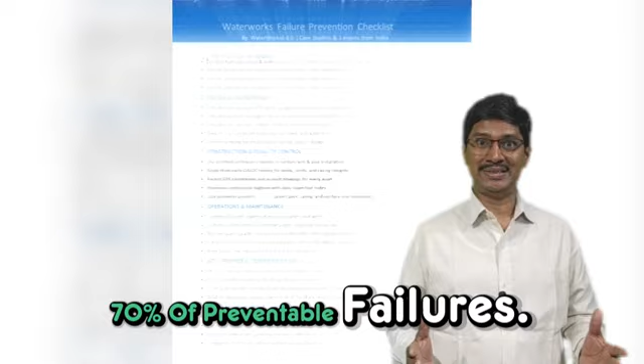Every failure you will see today is real people, real engineering decisions, real consequences, and the same mistakes repeat again and again from small panchayat to mega city. So this video is not just information, it's a survival guide for engineers, consultants, contractors, operators, and even administrators. Alright, let's begin.

Let's start in Chennai, 2019. You may remember the headlines. City faces day zero. 4 major reservoirs bone dry. People lined up for hours near tanker stations. Hotels shut down kitchens. IT offices reduced working days. But here is the truth. This was not only a rainfall crisis, it was a structural and planning crisis.

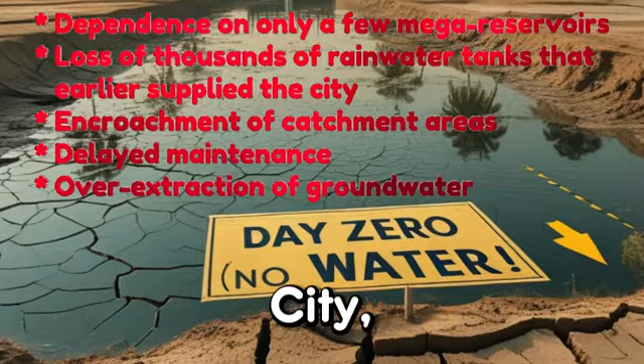What went wrong? Dependence on only a few mega reservoirs. Loss of thousands of rainwater tanks that earlier supplied the city. Encroachment of catchment areas. Delayed maintenance. Over-extraction of groundwater. The engineering lesson: a system fails when it has no redundancy and no recharge.

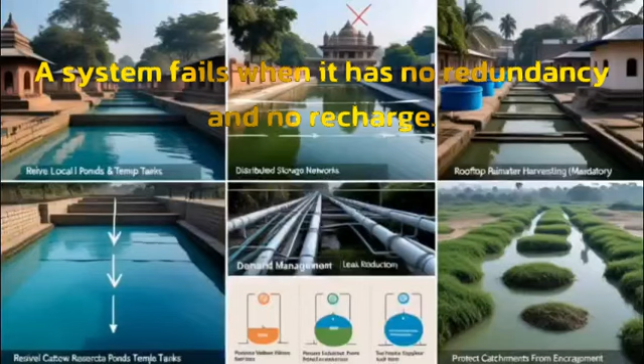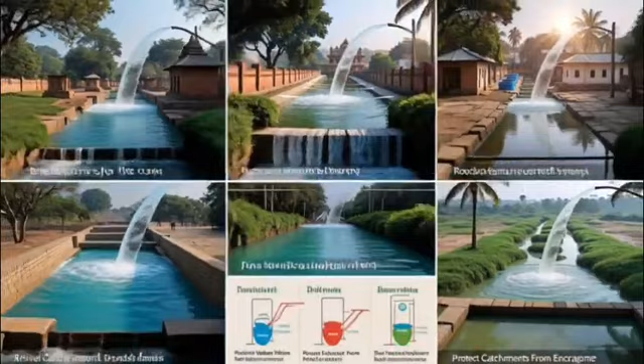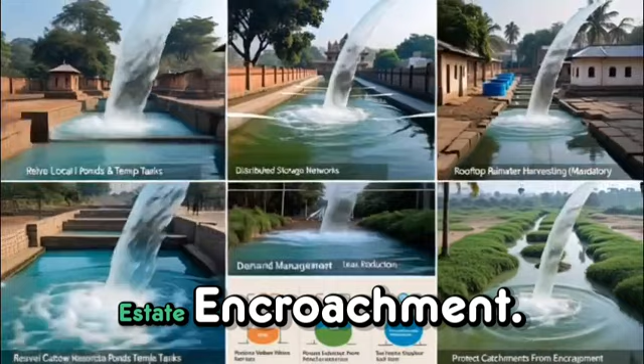Prevention strategy: revive local ponds and temple tanks. Create distributed storage networks, not single point dependence. Mandate rooftop rainwater harvesting enforcement. Use demand management, pressure control, tariffs, leak reduction. Protect catchments from real estate encroachment. Diversify supply, recharge always. Don't wait for the reservoir to run dry.

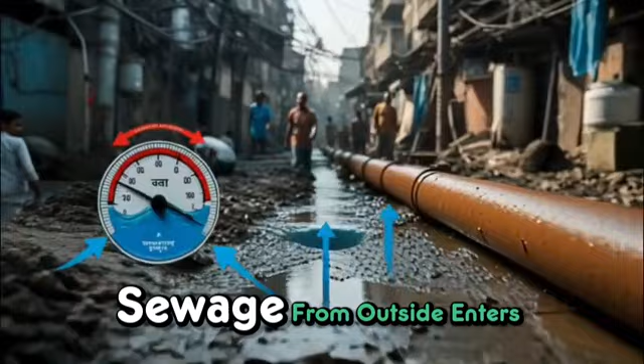Now shift to Delhi, a city with one of the largest water distribution systems in India. Yet, non-revenue water is massive. Pipes are decades old. Many sections still run on intermittent supply, and that's where the contamination starts. Because every time pressure drops, sewage from outside enters through the cracks and joints. Residents often report foul smell, light brown water, or sudden turbidity spikes.

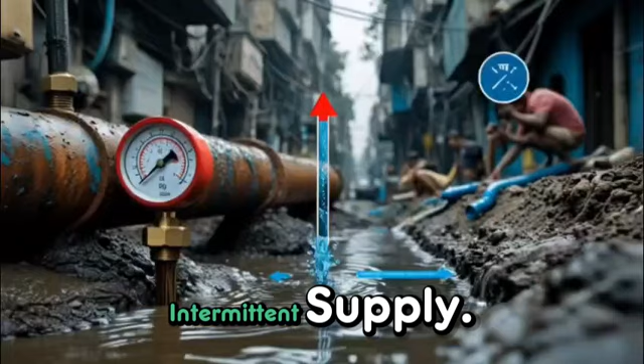Let's see its causes. First, old pipelines made of GI or corroded steel. Second, unchecked illegal connections. Third, pressure drops due to intermittent supply. Fourth, no district metered areas. Fifth, limited preventive maintenance. We can see many cases in sites like this. In several Delhi colonies, samples repeatedly failed bacteriological tests right after supply resumed. Classic sign of negative pressure suction.

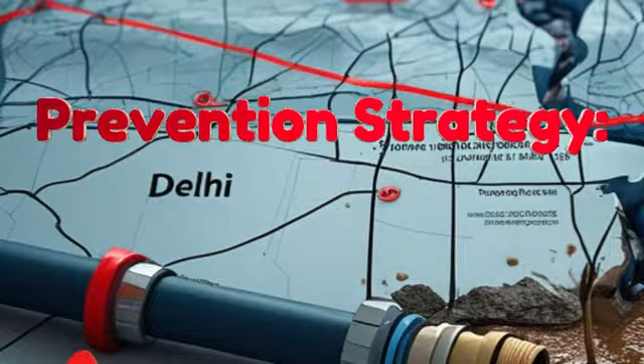We can improve the supply by adopting these prevention strategies. First, upgrade to 24/7 continuous pressurized supply. Second, replace vulnerable mains with HDPE or DI. Third, deploy DMAs with smart meters. Fourth, GIS map all pipelines and valves. Fifth, strict cross connection enforcement. Sixth, maintain chlorine residual uniformly. And always remember, pressure plus good pipes equals safe drinking water.

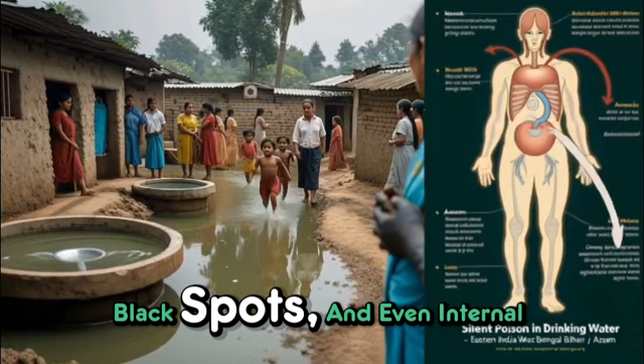Let's move east. West Bengal, Bihar, Assam. Here, millions depend on shallow tube wells. But over the last few decades, arsenic contamination emerged as a silent killer. Chronic exposure leads to skin lesions, black spots, and even internal organ damage. In Western India, the parallel story is fluoride contamination, causing bone deformities in children.

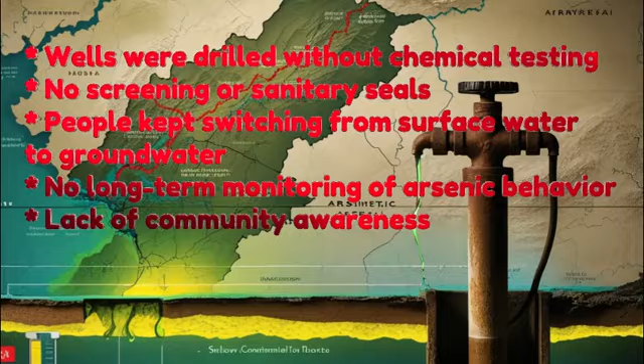Why did this happen? First, wells were drilled without chemical testing. Second, no screening or sanitary seals. Third, people kept switching from surface water to groundwater. Fourth, no long-term monitoring of arsenic behavior. Fifth, lack of community awareness. Field insight: a single village having 40 hand pumps may have arsenic safe water in 3 pumps and unsafe water in the remaining 37 just because of geological layering.

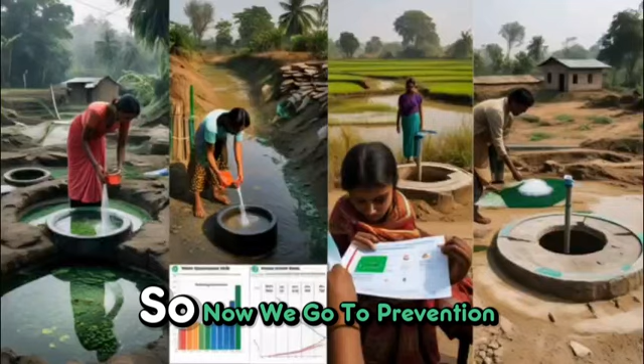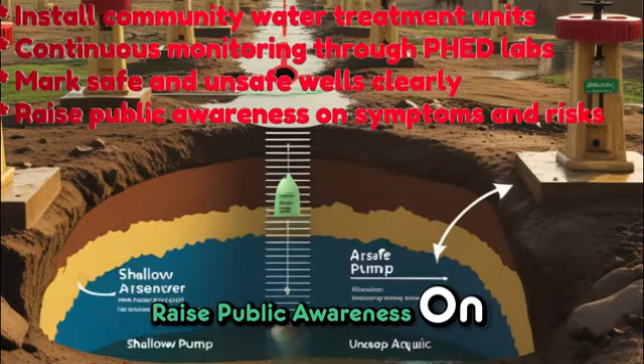So now we go to prevention strategy. First, always perform pre-drilling water quality tests. Second, use deep aquifers only after expert hydrological verification. Third, install community water treatment units. Fourth, continuous monitoring through PHED labs. Fifth, mark safe and unsafe wells clearly. Sixth, raise public awareness on symptoms and risks. And always keep in mind: never pump what you have not tested.

In Bengaluru, a single pipeline burst can waste lakhs of liters and flood entire stretches of road. Why so frequent? Because the network is old, the terrain is hilly, and pressure fluctuations are extreme. In many cases, the pipeline failure is not due to material failure, but pressure management failure. Let's see some root causes here.

First, uneven pressure zones. Second, road cutting by multiple agencies. Third, aging pipelines. Fourth, no predictive maintenance. Fifth, lack of valve control maps. Now we go to a case example.

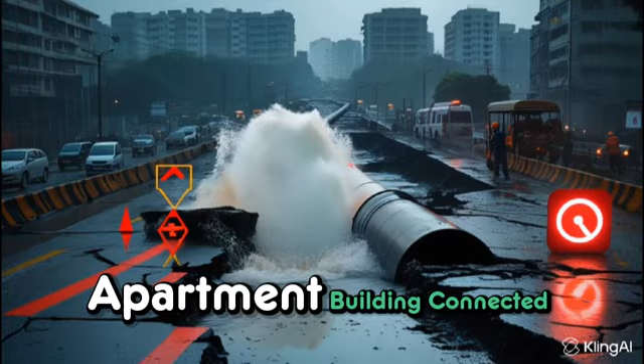A DI main burst after a new apartment building connected illegally and shifted loads on the pipeline bedding. In another case, contractors digging for optical fiber damaged a major water main because no accurate GIS map existed. Therefore, we are to go for its prevention strategy.

First, routine pipe condition assessment. Second, road cutting coordination across departments. Third, replace high-risk pipelines on priority. Fourth, install pressure reducing valves (PRVs). Fifth, a community leak report app. Sixth, emergency repair teams with response targets.

Key message to bear in mind always: fix leaks when they whisper, not when they scream. Finally, the rural and coastal crisis. Gujarat, Tamil Nadu, Andhra Pradesh, Odisha.

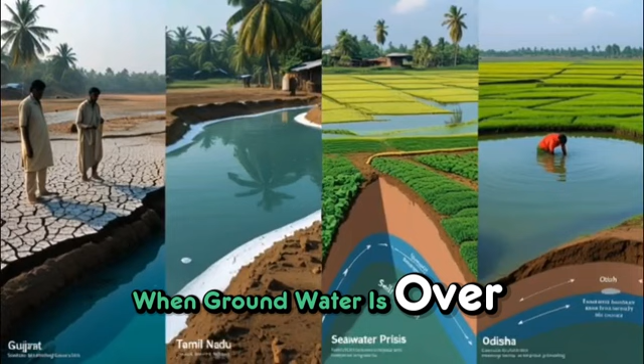When groundwater is overpumped, freshwater pressure drops and saltwater enters the aquifer. Farmers notice it first. Their pumps give more water, but it becomes salty. Then borewells start collapsing or yielding very low discharge.

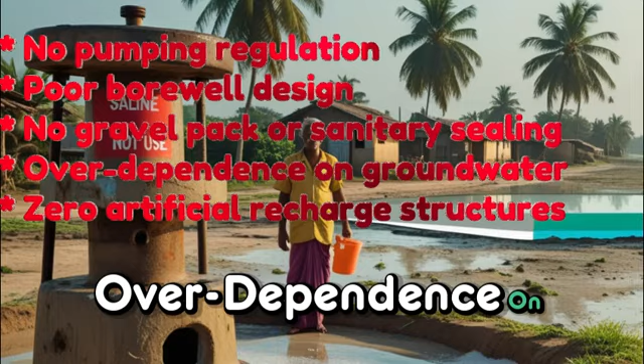Key causes we noticed about these are: first, no pumping regulations. Second, poor borewell design. Third, no gravel pack or sanitary sealing. Fourth, over dependence on groundwater. Fifth, zero artificial recharge structures. Here we look at field restoration.

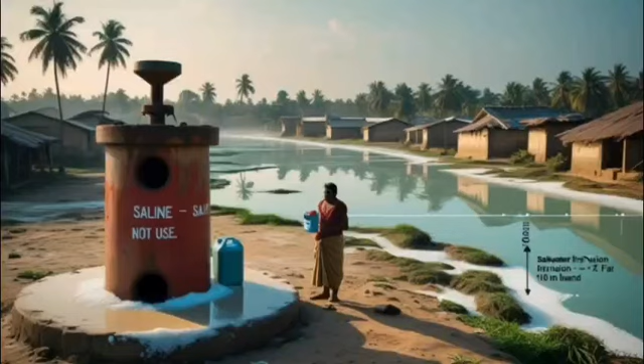In parts of coastal Tamil Nadu, entire villages abandoned old borewells because saltwater intrusion reached 7 to 10 kilometers in length. So now we can take these prevention strategies. First, pumping permits and monitoring. Second, proper well design: casing, screen, gravel pack. Third, mandatory recharge wells and percolation ponds.

Fourth, reduced pumping during summer. Fifth, promote treated surface water over groundwater. Final message to remember: pump less, recharge more, protect your aquifer.

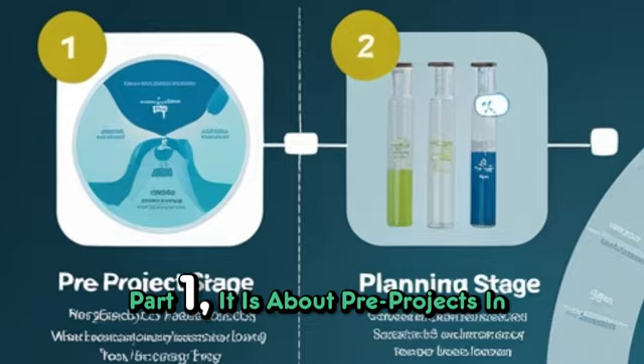Here is your WATERWORKS 360 prevention checklist. It has been divided into 5 parts. Use it during planning, tendering and field inspections. Part 1 is about pre-project: first, hydrogeologic survey. Second, soil suitability check. Third, water quality testing. Fourth, risk register. Fifth, community consultation.

The second part is about design: first, redundancy in storage. Second, pressure zoning. Third, certified pipe materials. Fourth, sampling points. Fifth, cross connection separation.

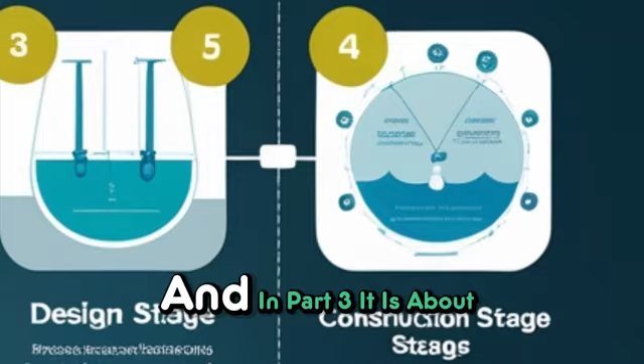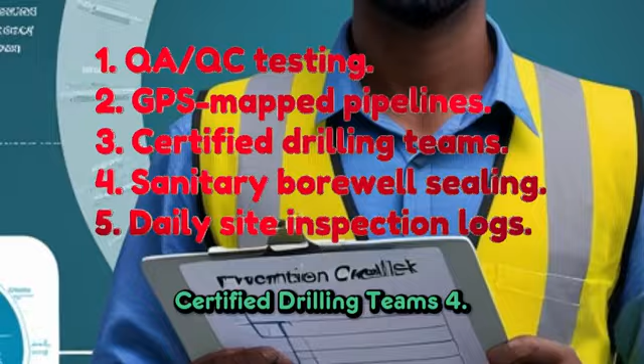Part 3 is about construction: first, quality assurance with quality control testing. Second, GPS-mapped pipelines. Third, certified drilling teams. Fourth, sanitary borewell sealing. Fifth, daily site inspection logs.

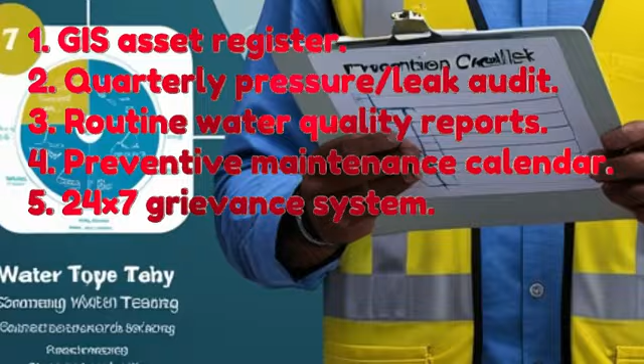Part 4 is about operations: first, GIS asset register. Second, quarterly pressure or leak audit. Third, routine water quality reports. Fourth, preventive maintenance calendar. Fifth, 24/7 grievance system.

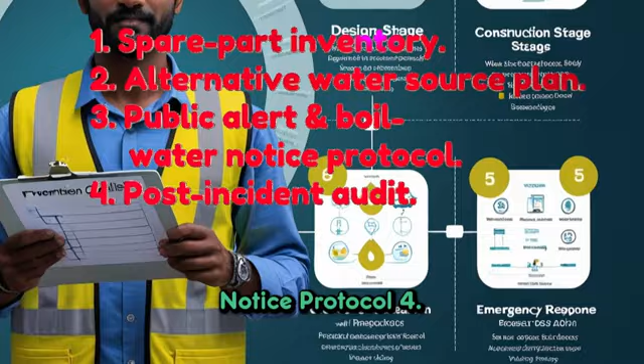Part 5 is emergency response: first, spare parts inventory. Second, alternative water source plan. Third, public alert and boil water notice protocol. Fourth, post-incident audit. That's all about the water prevention checklist you see here.

Water failures are not destiny. They are engineering problems with engineering solutions. If you are an engineer, take this checklist to your next project site. If you are a citizen, demand proper testing and leak control in your city.